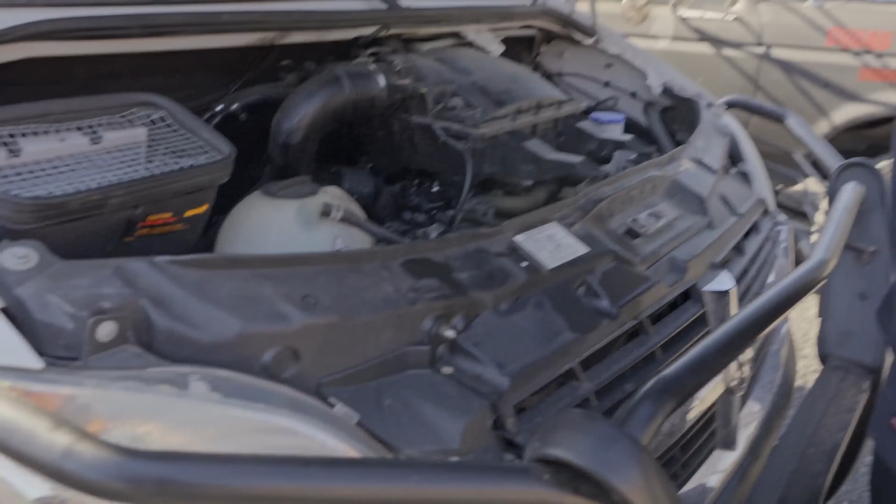All right, so now let's go in the vehicle. I'm going to get the scan tool connected. We're gonna scan the engine computer and see what codes we have, and after that we're gonna take the vehicle on a test drive.

So now let's go in the vehicle. I have my scan tool connected to the van. I'm gonna start the engine. As you can hear, the engine is running. This van has 38,000 miles, 955. Wow, this vehicle doesn't have a lot of miles.

Okay, so I'm gonna show you guys the dash. As you can hear, the engine is running and we don't have a light on the dash. Okay, let's see if we have any pending codes in the engine computer.

All right, I'm gonna turn off the engine. I'm gonna turn the key on. Let's see if we have some codes in the engine computer.

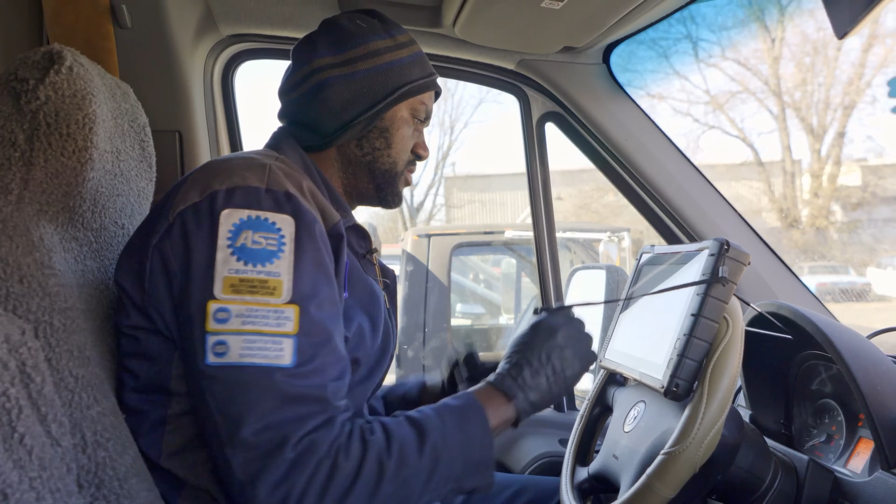That's a great question. The only difference is just different companies, but they pretty much use the same engines. Dodge partnered with Mercedes around 2007, 2008 - they were making them together. Mercedes was making the engine, and Dodge was making the body, I believe. Actually, I think Dodge was buying the engines from Mercedes and putting them in their van. Eventually they went separate ways because Mercedes kept making them afterwards, but the Dodge Sprinters stopped being made around 2008, 2009. So it's basically the same thing. The short answer would be Dodge and Mercedes were working together at some point, and then it didn't work out, and they went separate ways.

Okay, so 2007 - the scan tool has identified the vehicle. We're gonna click OK, let's do a code scan. Although the check engine light is not on, let's scan.

Oh, so right off the bat we have 4 trouble codes in the engine computer. What's interesting is the check engine light is not on. So the first code is 2853. It says invalid code - this code can be ignored and erased.

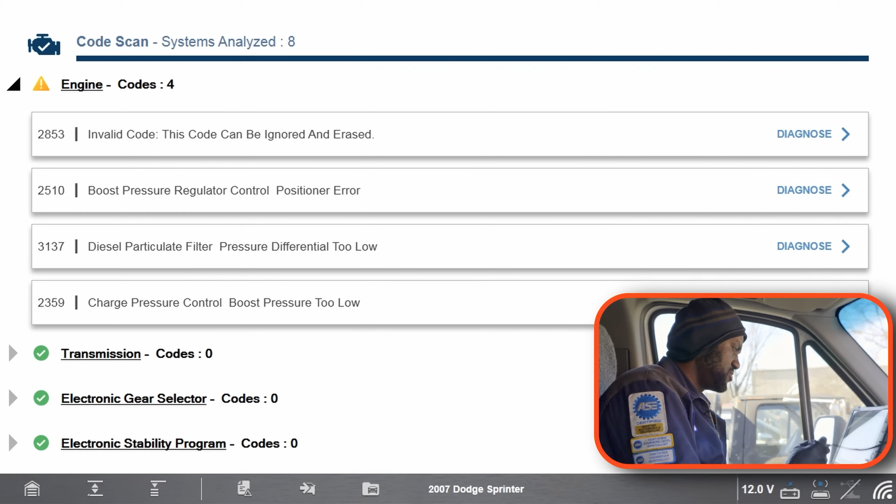And then the last code is 2359, charge pressure control, boost pressure too low. Okay, so we have kind of the same code listed twice. Well, no - the first one is about the regulator, and the last one is the boost, so the boost pressure is too low - a low boost code. So let's scroll down and see what else we have. We have 0 codes in this control unit.

We have 1 code in the HVAC control unit. It says 9301 blend air door control circuit performance. And then we have no codes on the generic side of the tool.

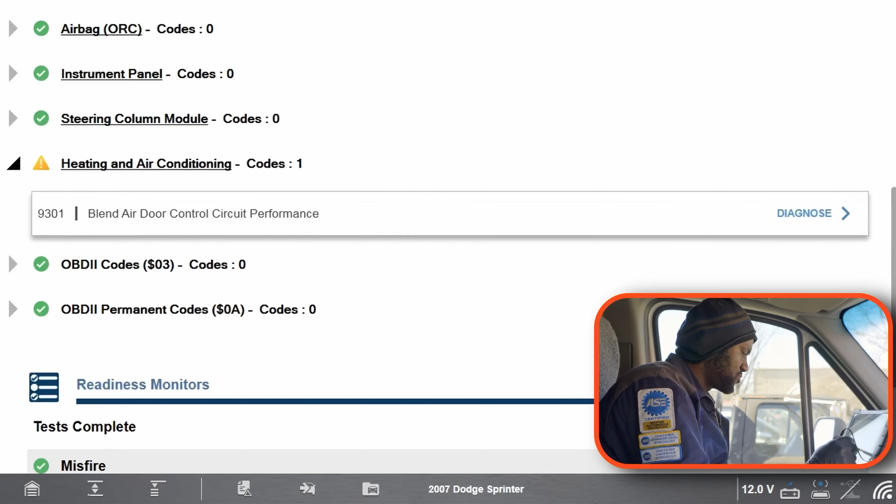Based on the codes that we have, it looks like we have 2 issues. We have a low boost code and we have a DPF code. The pressure differential is too low. So let's focus on the low boost code first.

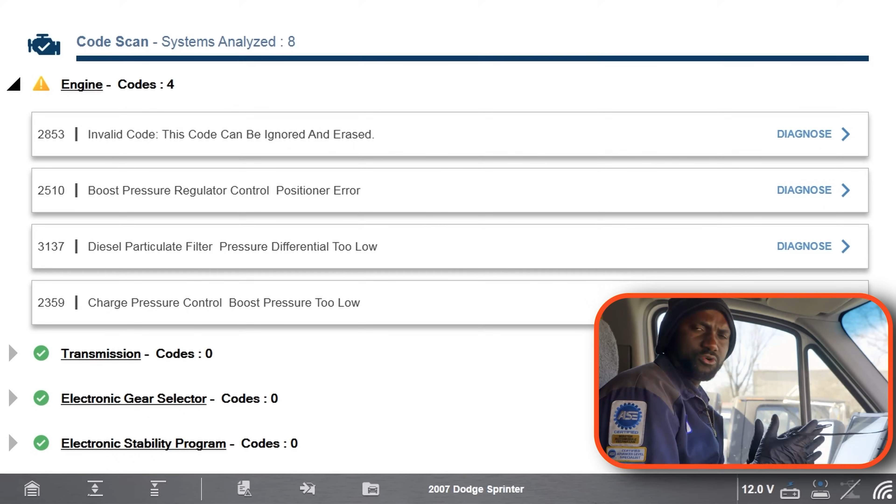Let's go into the engine computer. Let's read the codes again. So what I want to do now is go on a test drive and look at my boost pressure data PID as we are driving. But before we do that, let's look at some DPF data PIDs.

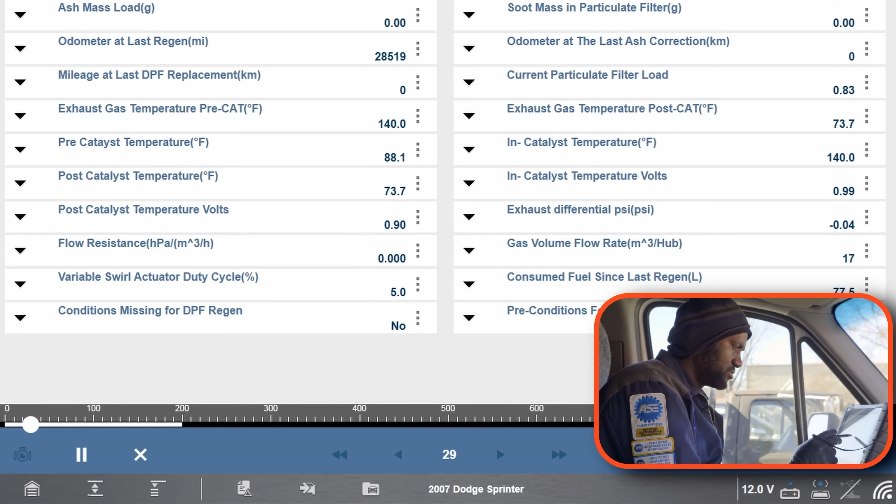Let's look at the soot level in the DPF. So soot content, ash mass load is 0 grams. Soot mass in particulate filter is 0. Current particulate filter load is 0.83. And exhaust differential is minus 0.04.

Interesting. I don't really see a number that's alarming here, but we'll have to do some tests and figure out what's going on. So let's back out. We might have to check the pressure differential sensor on the DPF to make sure that it's working well.

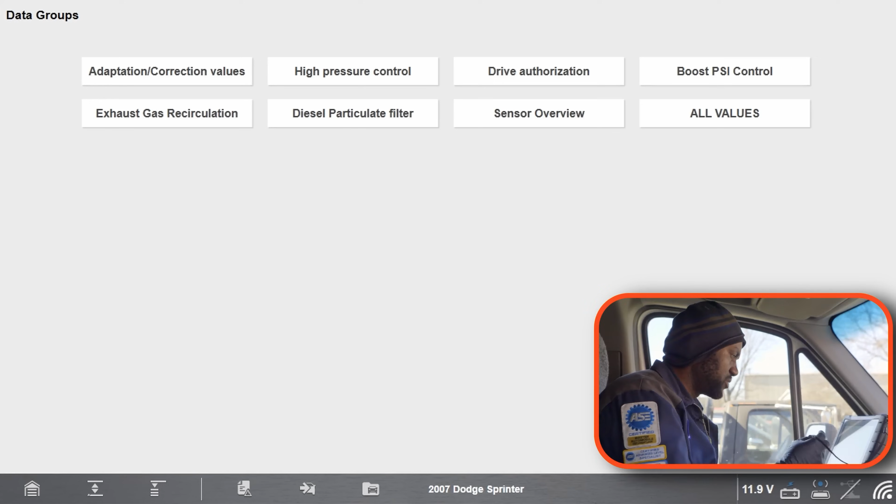So let's go to boost PSI control. Let's graph our boost pressure data PID. Okay, now let's go on a test drive. I'm going to start the engine.

Right now at idle, we have 984 HPA. Let me rev up the engine. When we rev the engine here, the maximum boost we're building is 1600 HPA.

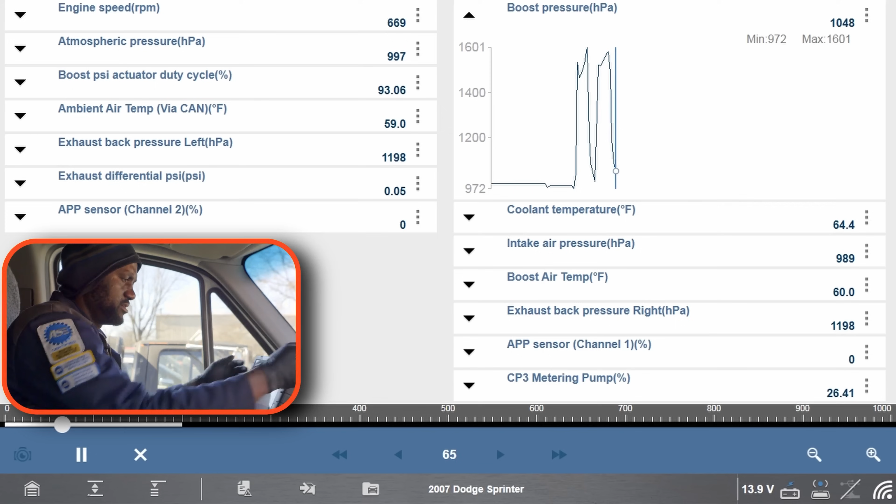I'm going to put the scan tool over here. Cameraman Kyler is going to put the scan tool up for you guys to see. So let's go for a spin.

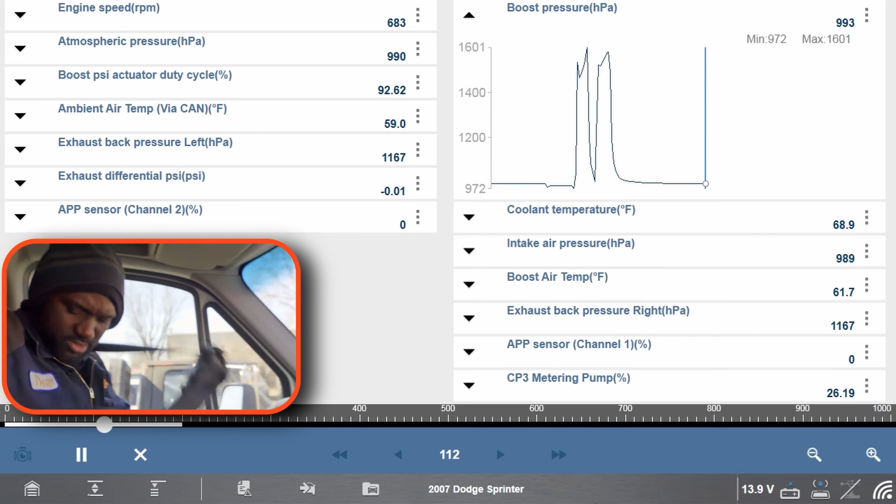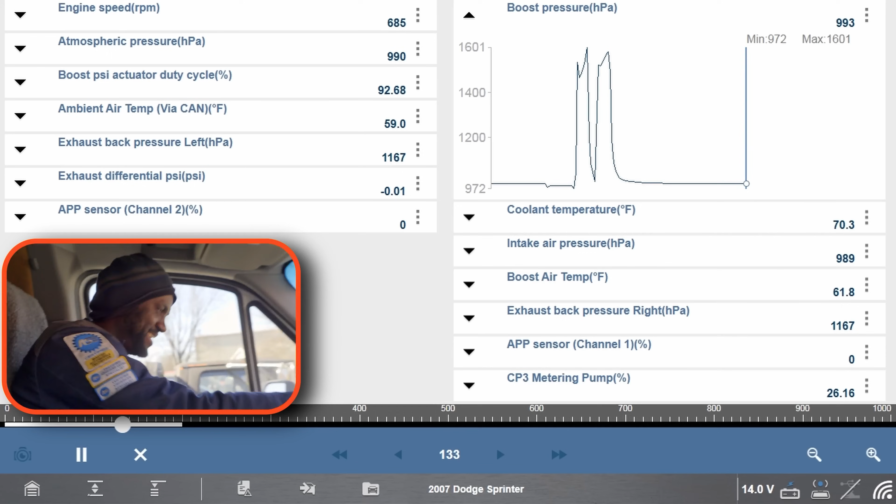I'm going to pay attention on how the vehicle is driving, and then we're going to watch our boost pressure to see how much boost we build under a load. Let's make sure cameraman Kyler gets his seatbelt on. Safety first.

It's interesting how there's a front camera, but there's no back camera. Unless you can switch it. I can switch, it's showing me the front, but it's not showing me the back. I want to see the back, not the front.

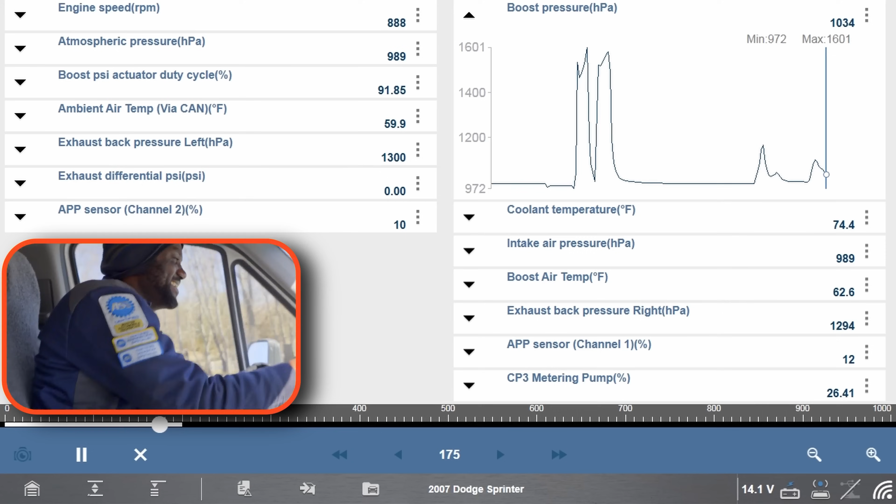There's a little hill up there that I like to go to if I'm testing a Sprinter.

Now we're building boost. I like the kind of boost we're building. That's good.

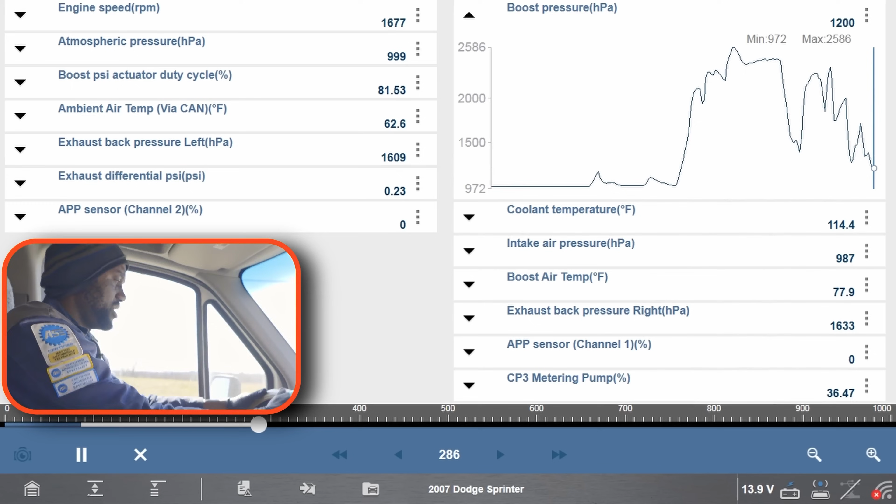The whole RV shell is also heavy, so that may cause it to lose power a little, I don't know. Maybe it's just a little delay. So far so good, it's not too bad, because this is a pretty big vehicle.

Mr. J is staying in town. Mr. J is the owner of this RV. So Mr. J, I appreciate you, thank you for your business. He's staying in Frederick for a little bit while we are fixing his RV.

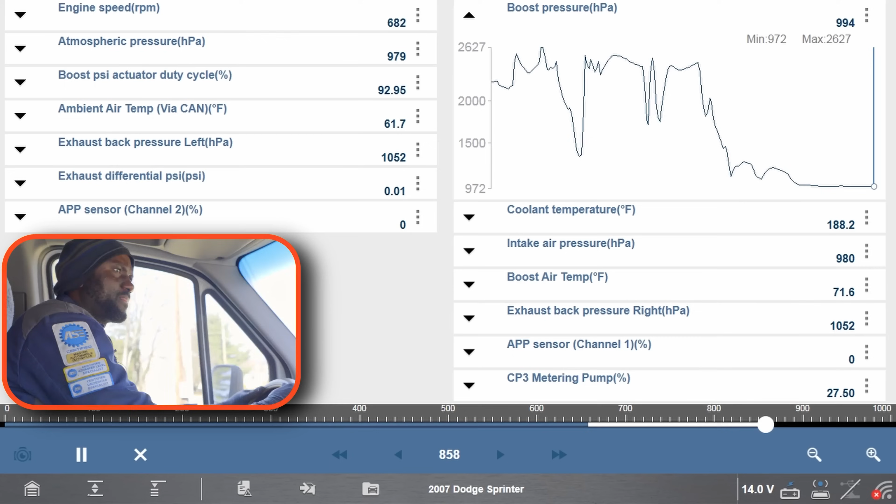So I'm flooring the accelerator pedal right now. Yeah, there's a little bit of a delay. Based on what I saw on the scan tool, we were building a decent amount of boost. This is interesting, so we built a decent amount of boost while we were driving.

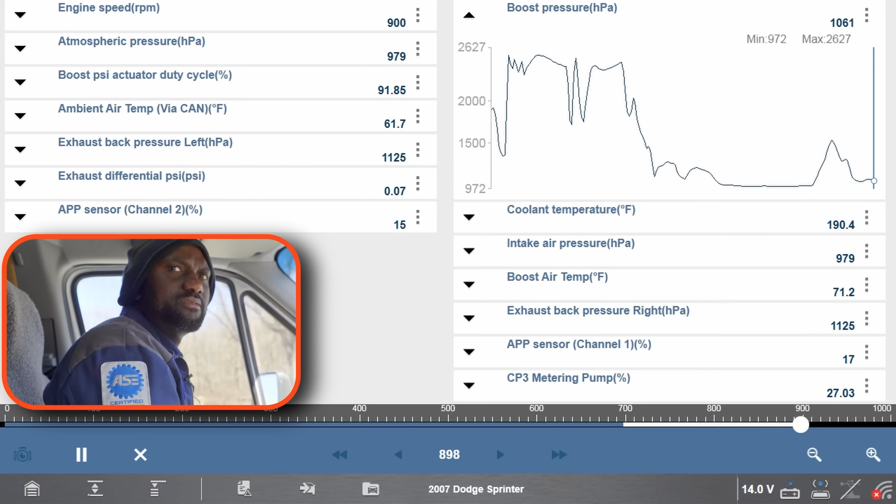The maximum boost we built was 2600. Okay, I can't really see on the other side. Are we good? Yeah, good.

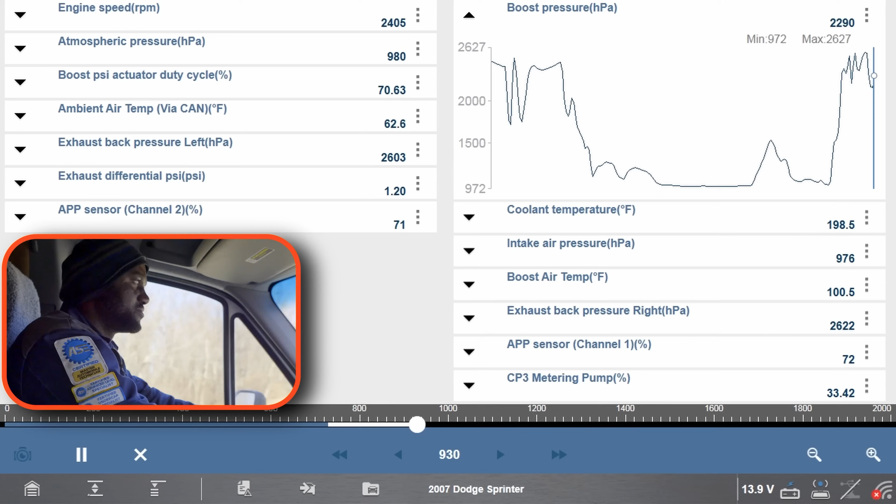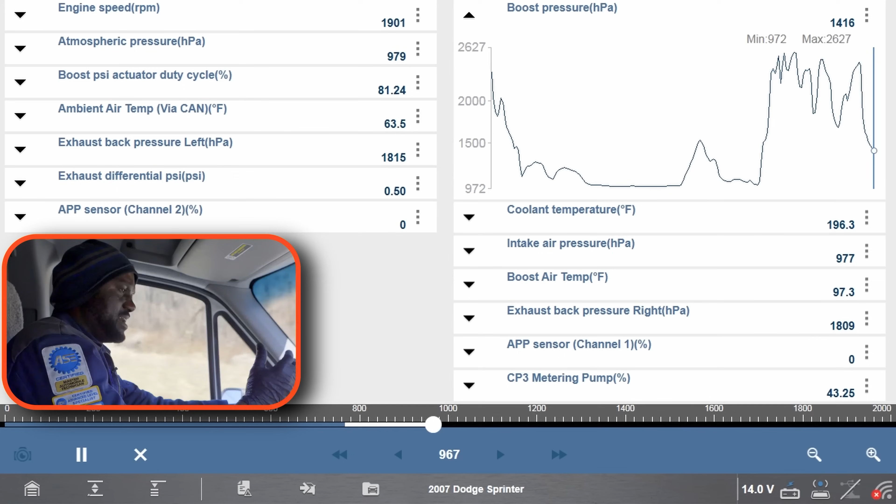Now, since we have an actuator code, we might have a turbo actuator that's failing intermittently, because right now I like the boost pressure that we're building. The boost pressure that the turbo is building is good right now, I don't see a problem with this. And since the check engine light is not on right now, I believe whatever caused the codes to be set is not present right now, so it's an intermittent issue.

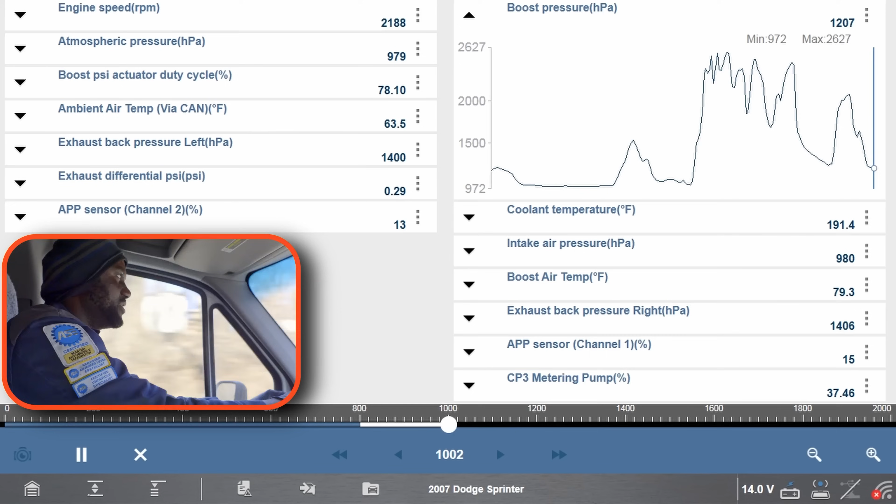Because when we were climbing up this hill, I looked at the boost pressure, we were around 2200 HPA while we were coming up this little hill. So we're going to go up this hill over here. Kyler, I don't know if the camera will be able to pick that up, but you guys can see, we're going up the hill. I'm flooring the accelerator pedal, we're building about 2200 HPA.

All right, so here's what I want to do, let's drive back to the shop. We're going to check the turbo actuator, and we're also going to give the vehicle a once over while we have the vehicle in the shop.

And then I'm also going to check the pressure differential sensor for the DPF to see if it's working properly, and then we'll go from there.

Right now I'm kind of confused why we have boost codes, because we are building enough boost. The other thing we could do is check for a boost leak under the hood, but I don't hear one. Usually when you have a boost leak, you'll hear a hissing sound coming from under the hood. I don't hear it.

But what we also might have to do is use our smoke machine and smoke the induction system to see if we have a boost leak somewhere.

So right now as I'm revving up the engine, our maximum boost right now is 2500 HPA. Okay, cool, this is enough data. I already gathered enough data.

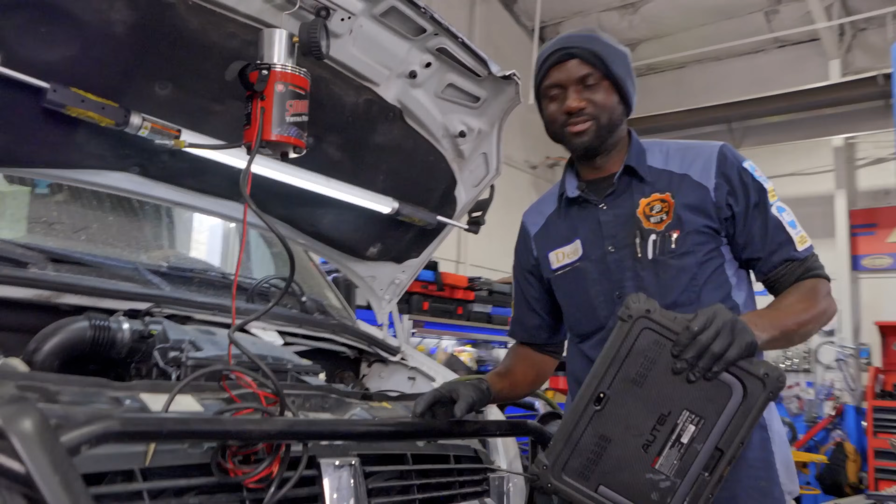We are in the shop, so now let's do some tests so we can figure out what's going on with this Sprinter van. I have my smoke machine over here. I also have my Autel scan tool connected to the vehicle.

The first thing we're gonna do is check the actuator on the turbo. The key is on in the vehicle. Let's do a code scan on this one. While this is doing that, I'm gonna grab a flat screwdriver.

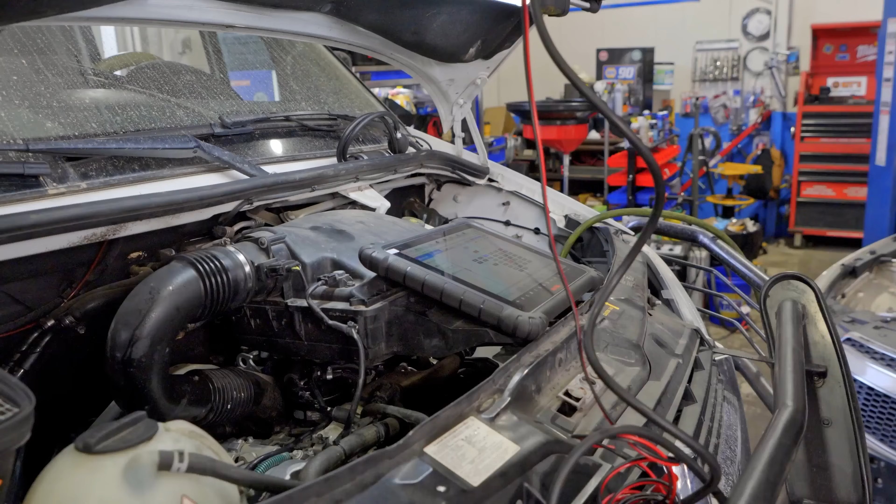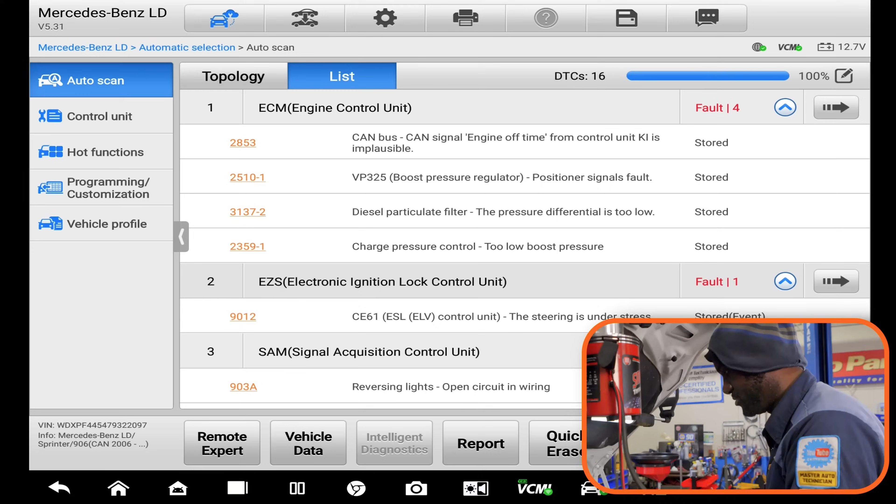Okay, so we have pretty much the same codes in the engine computer. These are the codes that we saw on our snap-on scan tool. So let's go into the engine computer.

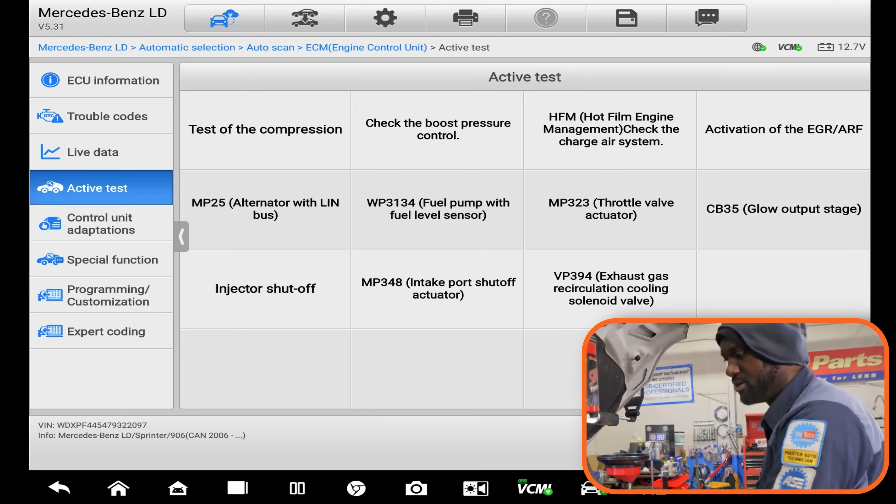Let's go to active test. Now, I prefer the Autel scan tool when it comes to active test on Sprinter vans than the snap-on one. So let's check the boost pressure control. We're gonna turn the actuator on and off.

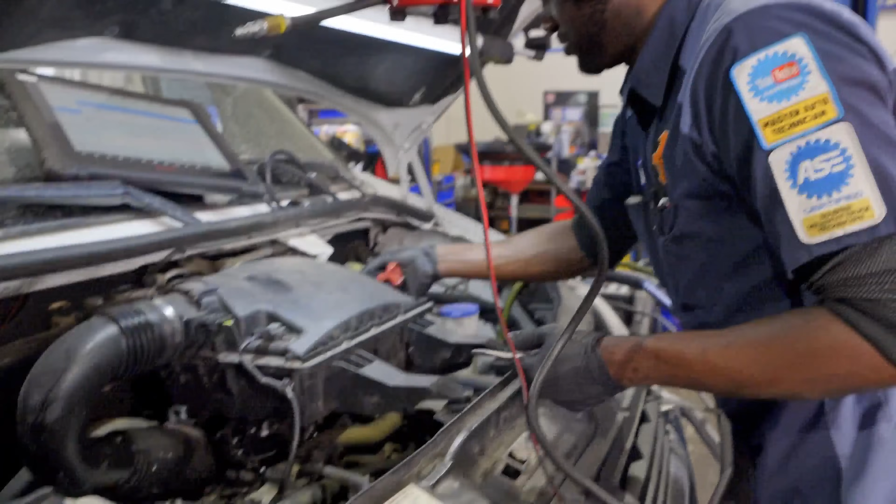Now I am going to move the air filter box out of the way. So I'm gonna undo this clamp.

I mean, you guys have seen me do this here on the channel. I'm not gonna disconnect the mass airflow sensor yet because I don't want us to have codes for the mass airflow sensor in the engine computer while we're doing this test.

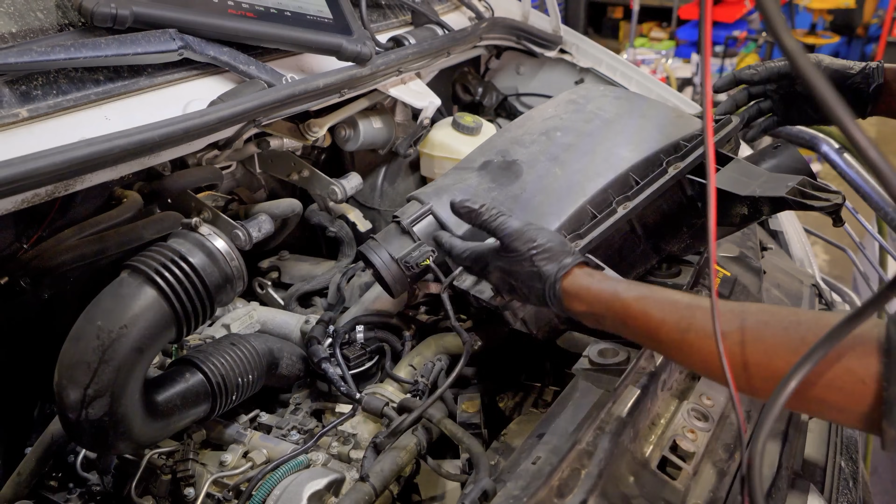And also I want to mention that there were covers over here that I did remove. There was a cover covering the top of the engine, and then there was a cover on the passenger side valve cover. So we did remove those covers off camera.

So cameraman Kyler, do you see this? Okay, this is kind of what we were checking on that blue Mercedes, remember? I do. Kind of the same thing.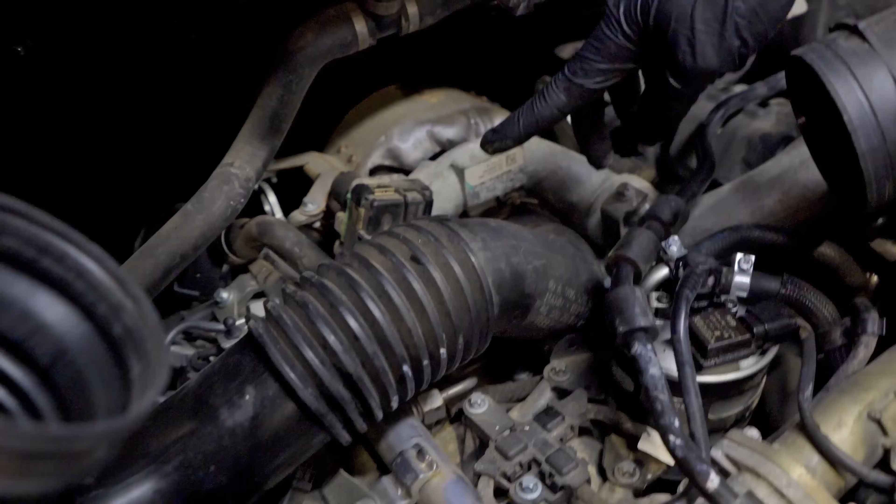Yeah, so I am going to turn on this actuator with the scan tool. If this actuator is good, when I turn it on, this lever should move up and down. So here we go. Goes up, down.

That's what I thought, because we were building enough boost when we were test driving the vehicle, so the actuator is working. Lever goes up, down, up, down. Although there's a little noise coming from it.

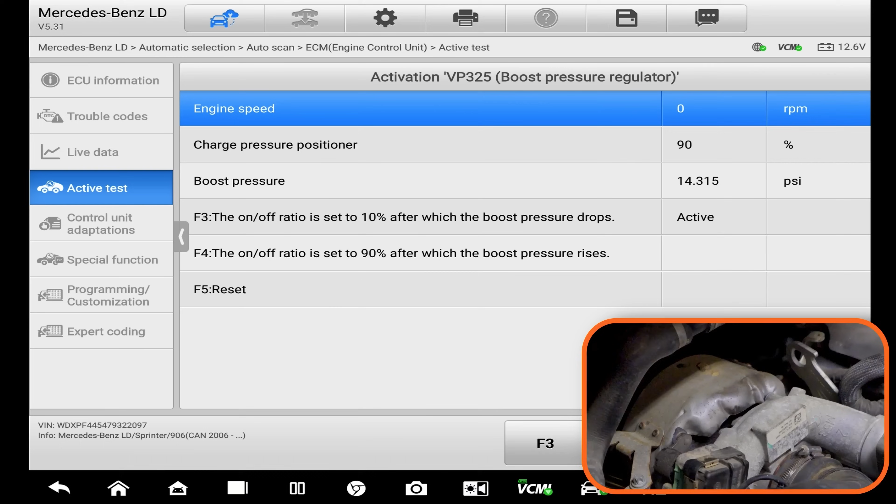All right, so we're done. The lever on the actuator goes up and down, which tells me that the wiring of the actuator is good. And since it's moving up and down smoothly, that also tells me that the actuator is good. So wiring is good, actuator is good.

So now what's the problem? Why do we have, actually let's look at the code again, why do we have a boost positioner regulator error?

The only thing I can think about is maybe it's failing intermittently, because we have the same code here: 2510-1, it says boost pressure regulator positioner signals fault.

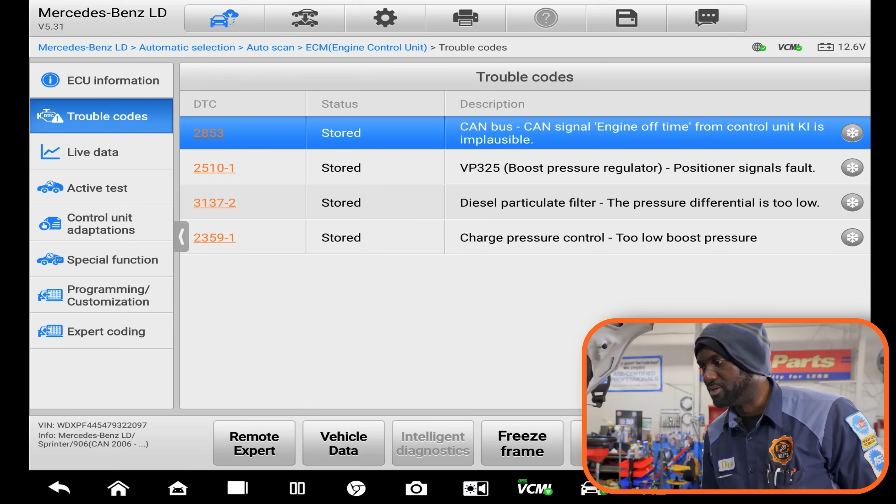So, I mean, this must be an intermittent issue because it's working now. I've seen these actuators fail intermittently. It's a bummer that it's not failing right now. So here's what I'm gonna do.

Now we're gonna use our smoke machine. We're gonna smoke the induction system to see if we have a leak between the turbo outlet and the intake manifold.

If we don't have a leak, then I'm gonna recommend replacing that actuator because I don't see what else can cause this. You know, we have a low boost code. All right, so let's see. Now I'm gonna go in the vehicle and turn off the key. Actually, I'm gonna check the filter.

The filter doesn't look, I mean, you guys won't see this. I'm looking through this opening here. The air filter doesn't look too dirty. We might have to replace it, because if you have a restricted air filter, that can cause the van to lose power as well, but the filter is not restricted. So I'm gonna turn the key off.

Okay, so the actuator is good. Let's get the air filter box out of the way. All right, let me stop this. Let's stop the communication with our scan tool. So now we're going to use our smoke machine. Let's send some smoke down the induction system and see what happens.

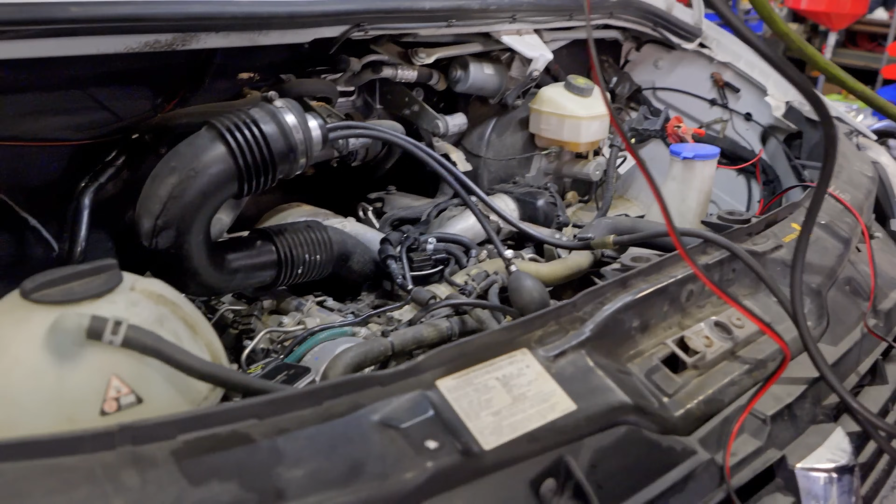Okay, I'm gonna connect my air line to the smoke machine. So we're gonna power our smoke machine. Okay, I'm gonna turn on my smoke machine. So we should see smoke coming out of this tube. Okay, so right here, our smoke machine is working. So now we're gonna connect it to this bladder. And then we're gonna observe and see if we have a leak somewhere. Let's see if smoke is gonna come out of somewhere here.

So our smoke machine has been on for a little bit now. I don't see a leak around the induction system. So if cameraman Kyler can focus around the engine here. So we don't see a leak, but I see a little bit of smoke coming out of this area. Oh, check this out. So it looks like we just found another problem here. I don't know how well the camera is picking this up.

So there's smoke leaking between the cylinder head and the vacuum pump. And there's a bolt that's missing over here. And this area is wet. Okay, you see oil around this area. Look at my finger. Okay, so my finger just got wet by touching around this area. So the vacuum pump gasket is leaking. Now this smoke is leaking from this area because smoke is going through the crankcase and leaking out over here.

So let's not get carried away by this. We are focusing on the induction system. So we don't have a leak over here. Now, if I open this filler cap, even the dipstick tube, you see there's smoke coming out of this. So look at this. Yeah, we got smoke there. So that is because we have smoke going down this tube and it's going through the PCV tube, and that's what's causing smoke to go into the crankcase.

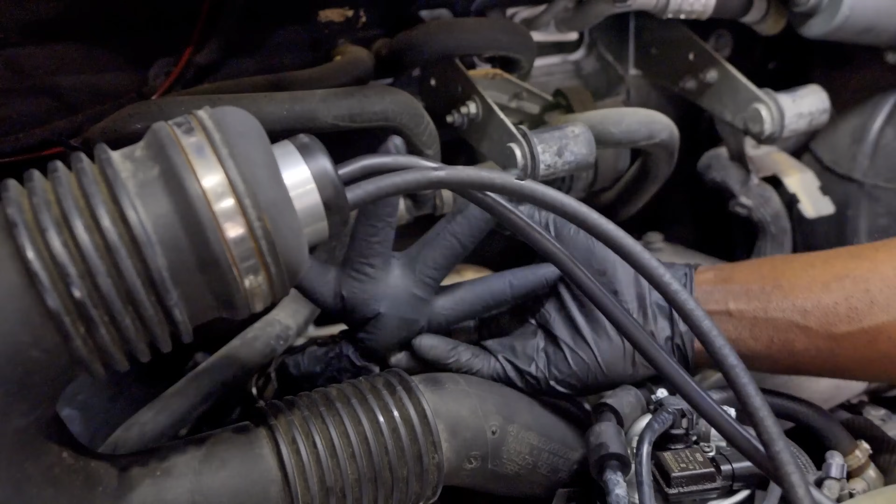Anyways, yeah, so we're gonna watch. Let's wait a little bit to see if smoke is gonna come out of somewhere. I don't see smoke coming out of anywhere. We might have to go under the vehicle to see if we have a leak around the charge air cooler.

Yeah, so this is kind of what I thought, because when we went on a test drive, I didn't hear a hissing sound. So usually when there's a boost leak and you drive the vehicle, you're gonna hear a hissing sound coming from somewhere, which I didn't hear. So I doubt that there is a leak somewhere around the induction system. Okay, so I don't see anything over here. So now let's go under the vehicle and see if we have a leak around the charge air cooler.

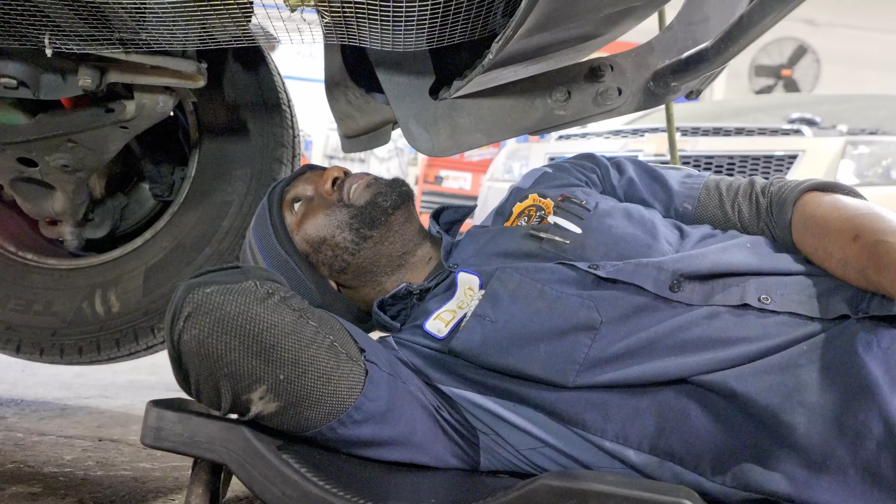The first thing I noticed is we have a huge oil leak over here. So if cameraman Kyler can show this leak. So usually when I see a lot of oil under the engine, from experience, the issue ends up being a leaking oil cooler. So maybe the oil cooler is leaking. We're gonna have to check that.

I looked around the charger cooler here. We don't have a leak around the charger cooler. Our smoke machine is still on. Besides the oil leak, everything over here looks good. It's also wet around this area, so it looks like the oil level sensor is also leaking. So we're gonna have to replace the O-ring for the oil level sensor. Yeah, look how much oil we have around the alternator. Dang, that's a lot of oil.

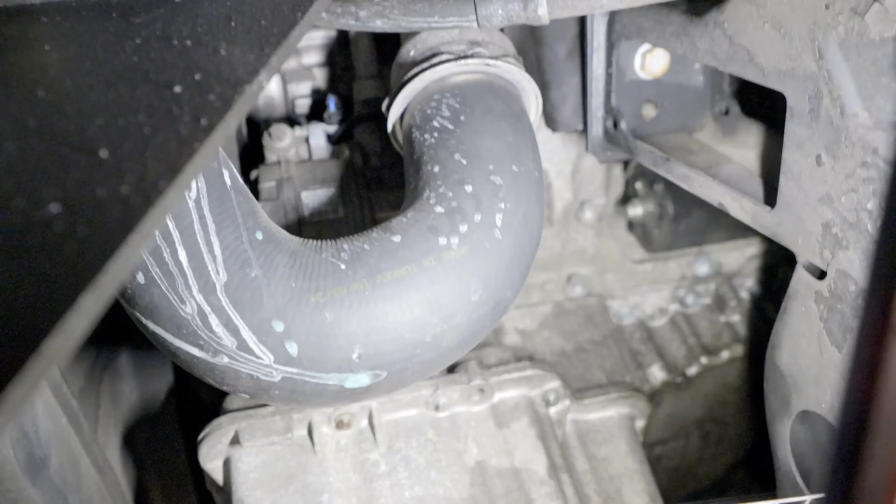Now, what we need to figure out is, is the oil coming from the oil cooler or is it coming from somewhere else? Because it's wet around this area, but the driver's side is not really wet. So cameraman Kyler, if you can come over here on the driver's side and show this side. So as you can see, the driver's side doesn't look too bad. It's the passenger side that's bad. So the driver's side is pretty dry.

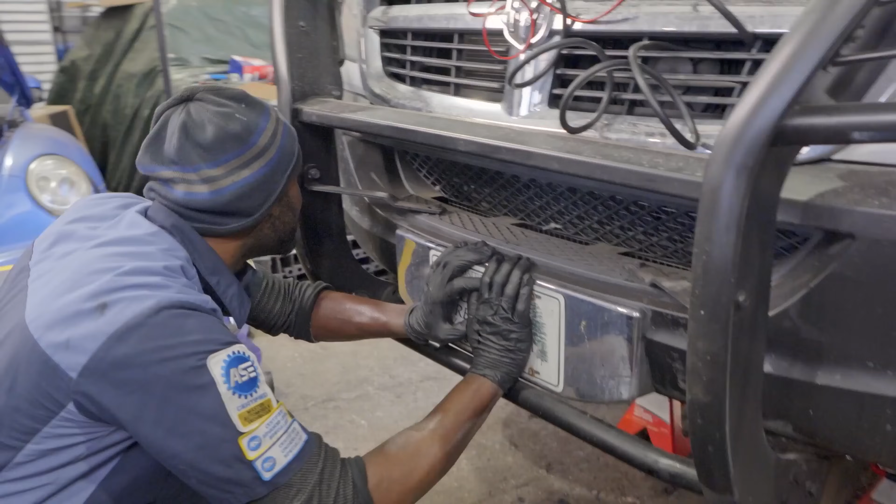I am also going to look down here around the charger cooler to see if the charger cooler is leaking. I mean, it's not. We don't have a leaking charger cooler. Okay, so no boost leaks that we can see. So that's good. Let's go back under the hood. Let me make sure our smoke machine is still pumping smoke throughout the induction system. Okay, so we don't have a leak, guys. I don't see a leak here. Okay, I guess that's a good thing.

So I believe our oil leak is coming from the vacuum pump gasket. Because, I mean, the camera is not going to be able to see this, but I'm looking between the intake manifolds to see if the oil cooler is wet, but it's not. So I might have to use a camera down there between the intake manifolds so we can look at the oil cooler.

Yeah, so, can you see around here, Kyler? You see how wet this is? So it looks like this cap is also leaking. So the seal on the oil filler cap is leaking. So we might have to replace this cap. And then since we have a missing bolt over here, I'm also gonna recommend replacing the vacuum pump seal.

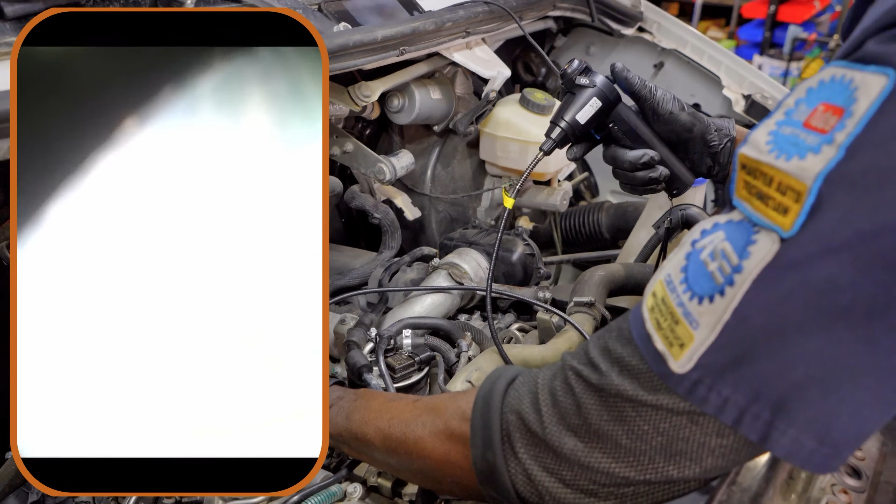All right, so we're gonna use our camera here. Look how cool this camera is to check our oil cooler. So cameraman Kyler is gonna put what I'm seeing on the screen for you guys so you can see. Okay, so everything down here is dry. I don't see a leak over here. Okay, look at our oil cooler. Yeah, there's the oil cooler down there. Check that out. No, we don't have a leaking oil cooler.

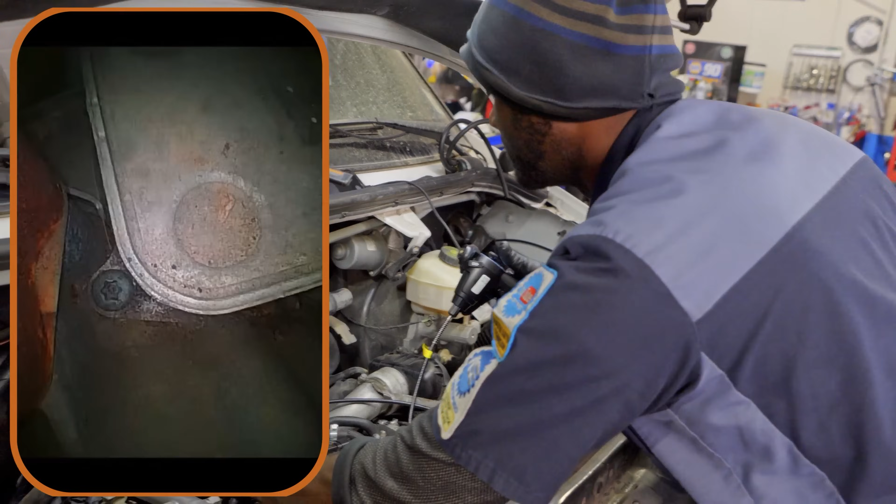I mean, I was gonna be surprised if I saw oil around the oil cooler because this vehicle doesn't have a lot of miles. Yeah, so our oil leak is not coming from the oil cooler. Let me see if I can put the camera down from this angle over here. Yeah, check this out. This is clean. Yeah, so no oil leaks around the oil cooler.

Yeah, that's the bolt for the oil cooler right there. All right, so we're good. Our oil cooler is not leaking. I believe the leak that we have is coming from the vacuum pump. The vacuum pump gasket is leaking. I mean, not that I believe, I'm sure that's what it is, because we have oil over here around the vacuum pump and we have a missing bolt over here.

So here's what I'm gonna do. To fix this, what I'm gonna recommend is replacing the turbo actuator. Although it's moving up and down, I'm gonna go based on the code that we have. Since the actuator is moving up and down, I don't need to check the wiring. The wiring is good. From experience, I've seen these actuators fail intermittently. So sometimes they work, and sometimes while you're driving, they stop working, and then they cause low boost codes to be set in the engine computer.

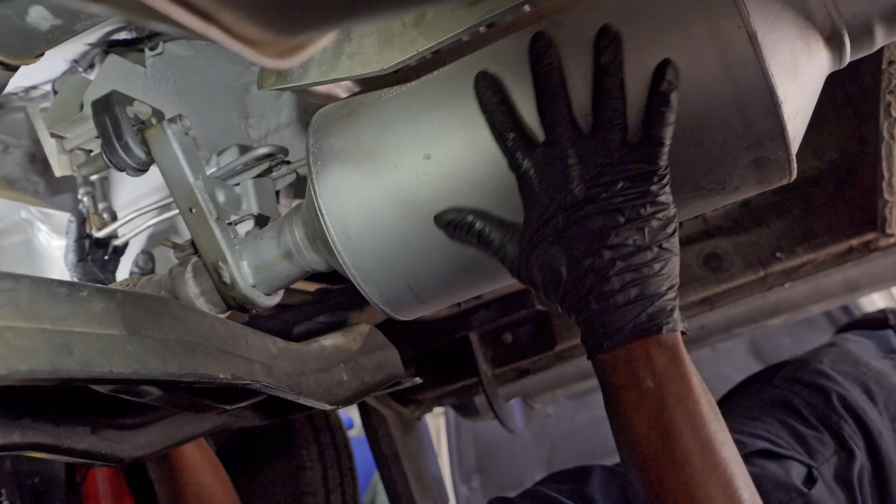So we're doing this on jack stands, so we have limited space. And I hope cameraman Kyler can see all this stuff. So this is our DPF, and up here is the DPF pressure differential sensor. So Kyler, can you see this tube? Yes. Awesome. So I'm going to disconnect this tube. So we're gonna disconnect the clamp over here. Okay. And then I'm gonna disconnect this tube from the metal tube, so we can check our differential pressure sensor. My hand might be in the way, I apologize.

So we're gonna undo this bracket, because what we need to figure out is it the DPF that's defective, or is it the sensor that's sending a skewed signal to the engine computer? So we got this bracket removed, so I can just bend this. Nice. Okay, now I'm looking at the hoses that go to the pressure differential sensor. Both hoses look fine. We don't have torn hoses. And also I'm looking at these tubes. We don't have a broken tube or a cracked DPF tube. So that's good.

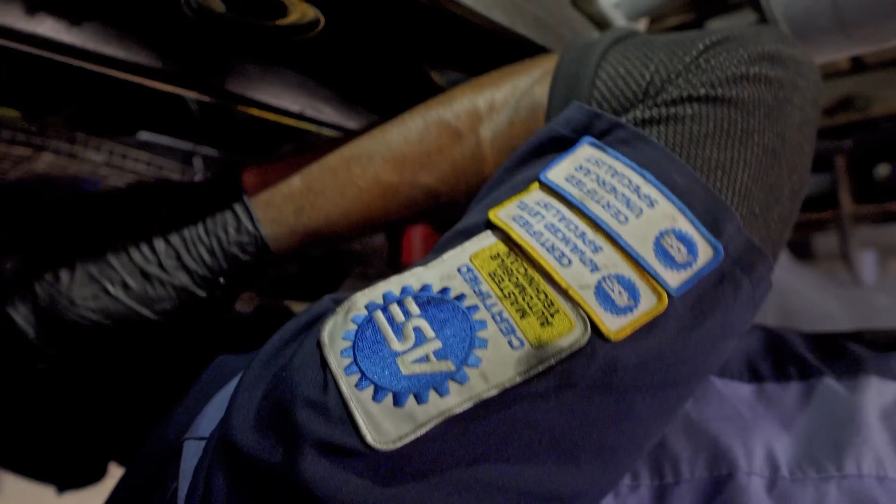So we're looking at... cameraman Kyle is laughing at me. You're laughing at me holding my hand.

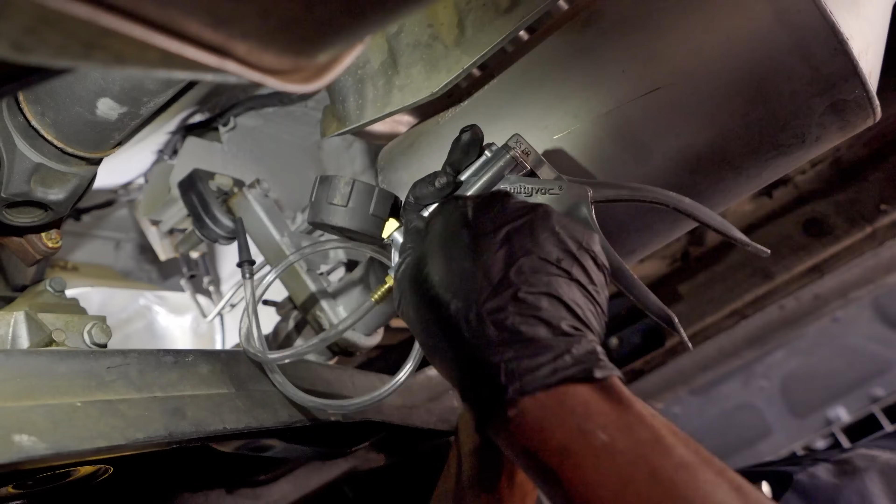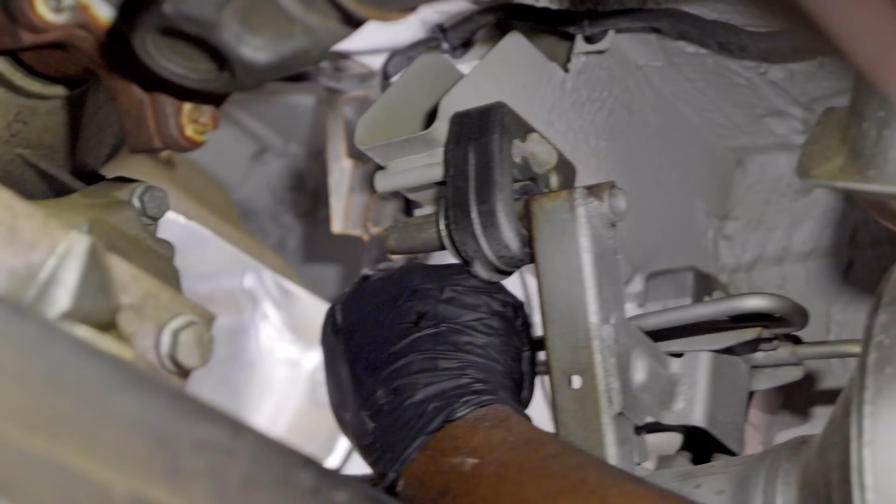So we have scan data pulled up. I'm looking at the exhaust differential PSI data PID on the scan tool. I'm gonna use this pressure pump. So this is a vacuum pump / pressure pump. So if you turn this way, you set it up to vacuum. If you turn it this way, you set it up to pressure. So I'm gonna connect this line to the line that goes to the pressure differential sensor. We're connecting it to the big line, by the way, the big line that goes in front of the DPF.

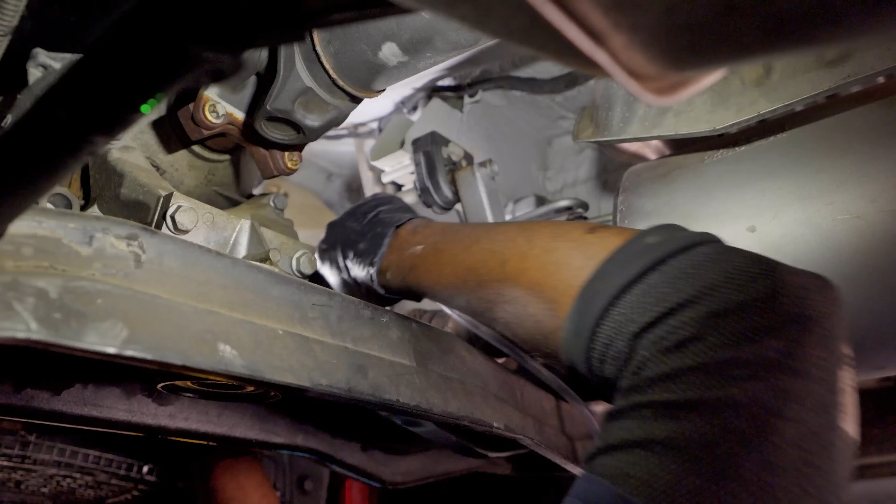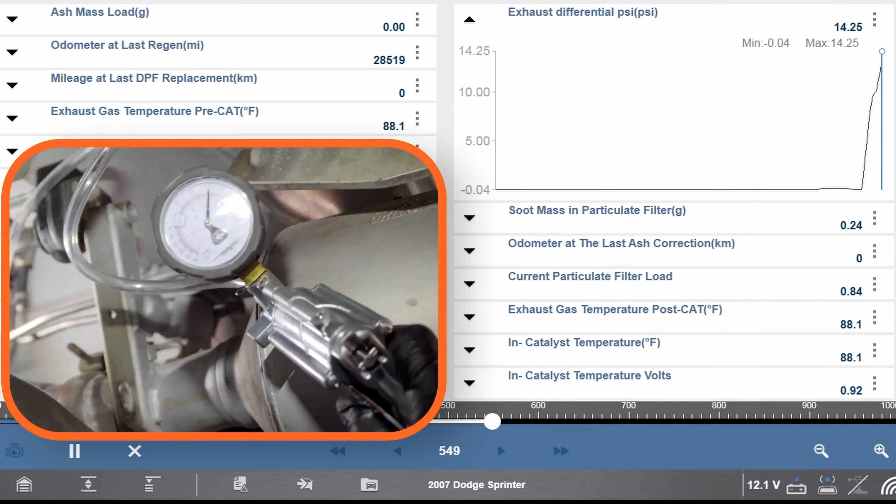Okay, it's right there. Let's see if I can get this light to stay here. Nice. Okay, so now you guys will focus on the scan tool. I'm going to send pressure down that tube. As I'm sending pressure down the tube, our data PID on the scan tool should change. And as I'm doing this, the pressure is changing on the scan tool, and we're holding pressure on this gauge over here, which tells me that the hose is not leaking and the sensor is good,

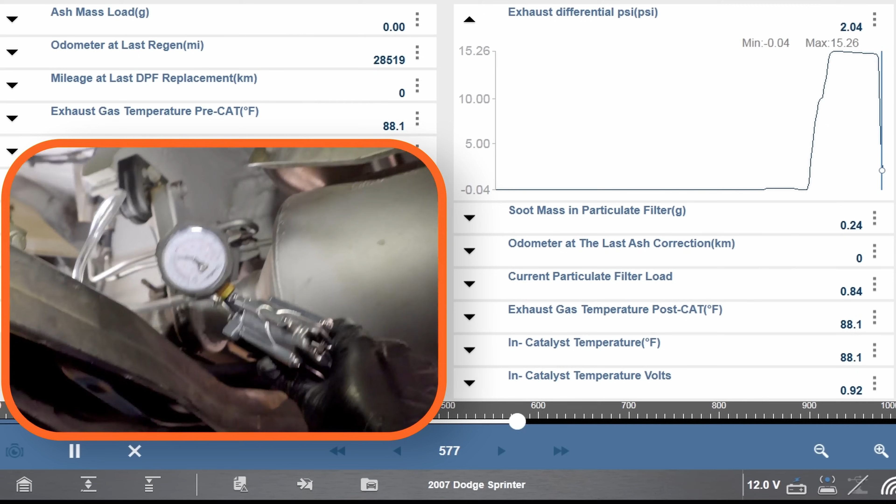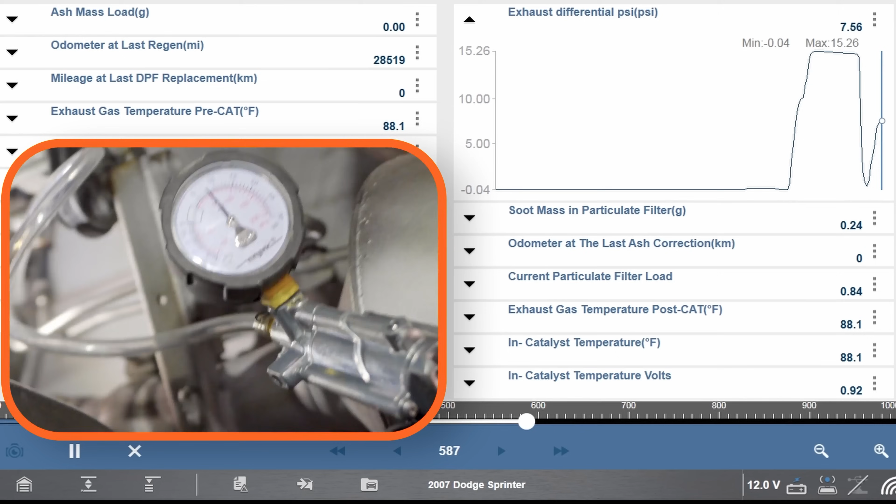because we have 15 psi on the data PID, and we also have about 15 psi on this gauge. So our pressure differential sensor is good. So I'm gonna release the pressure. We're gonna pump this again. Okay, our pressure should increase smoothly. As you can see, the pressure is rising on the scan tool smoothly. We don't have any dropouts.

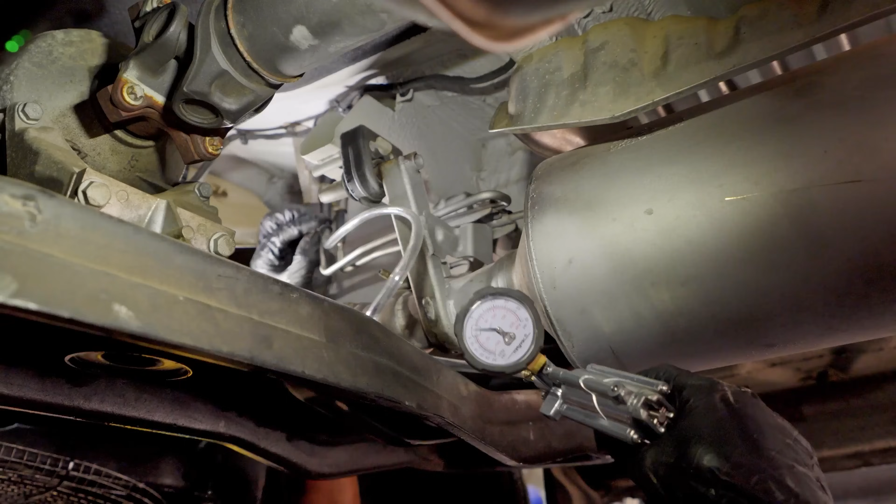Yeah, so that's good. I'm gonna release this again. All right, so we don't have to test the wiring of the pressure differential sensor. Pressure differential sensor is good. We don't have a clogged DPF. Also, based on the soot level and the ash content that we have in the DPF, this is fine.

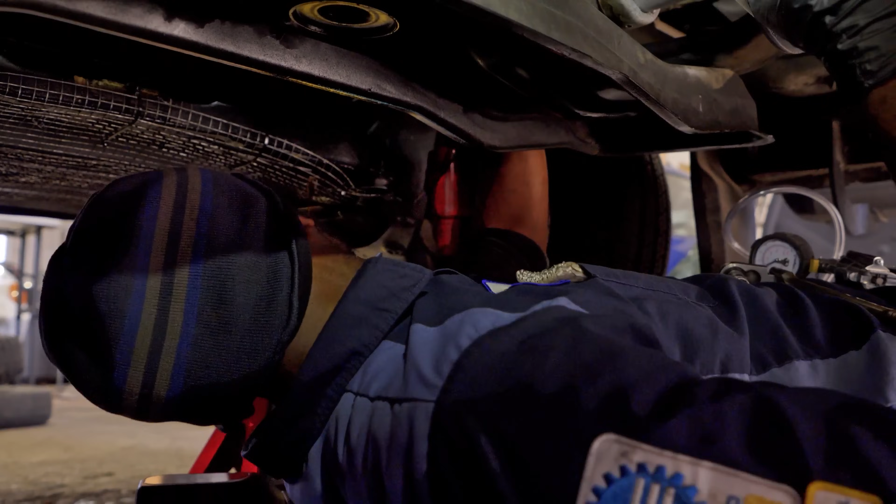I don't know why we have a DPF code in the engine computer. We might have to erase those codes and test drive the vehicle and see what happens. So we're gonna leave this alone. The sensor is good. Okay, so now let's go back under the hood. So we are done with our diagnosis.

The pressure differential sensor for the DPF, based on the data and the test that I did, the sensor is good. We don't have to check the wiring. You know, the sensor is reporting to the engine computer, and we can see the data change, the graph value change on the scan tool. So the sensor is good.

I might recommend a DPF clean on this one. We can clean the DPF with our DPF cleaner because, again, our customer Jay told us to take care of everything that this vehicle needs. So at this point, here's what I'm going to recommend. I'm going to sound like a broken record, but I'm going to say this again, just to recap before we wrap up this video. So this is going to be the diagnosis part of this RV. And then we might do part 2 about the repairs that I'm going to perform on this vehicle.

So we're going to reseal the vacuum pump, which is causing the leak. The vacuum pump gasket is leaking. We're going to reseal that. We're going to replace the bolts for it. And then we're going to reseal the oil level sensor below the oil pan. And then we are also going to replace the actuator.